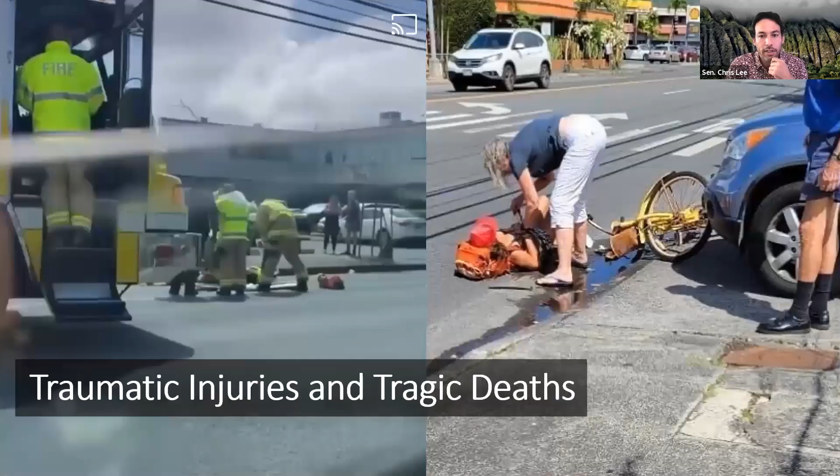The other thing we've been hearing a lot from our community, of course, is this kind of stuff - images of a couple unfortunate incidents just in the last month or two here in Kailua. This has been ongoing since I was a kid. I was hit by a car while riding a bike back in the day. And we see that constantly.

This is something that I think we all want to address. It's the worst thing to have to field a call from a family who lost their kid, or a family member, or a neighbor, or a friend. And yet here we are, still seeing a lot of that. So the question is, what do we do about it?

I think we leave it to the city - they've got a lot of good data on crash injuries and all that stuff - but our schools have reached out asking for help over the last few years. We've talked with the principals, talked with PTAs, talked with parents who want to be able to get their kids more safely to school. We've heard from our senior citizens and Kupuna and a whole bunch of organizations.

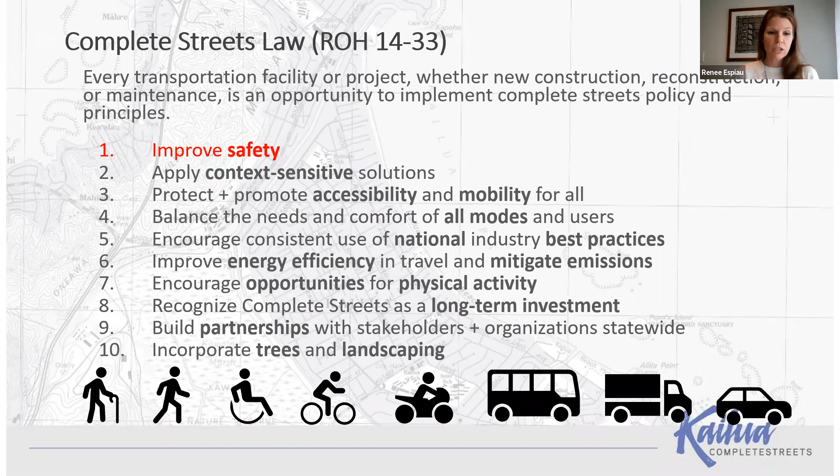Unfortunately the reality today is a little bit more like this. We've got lots of traffic, very heavy volumes at certain times of the day, high speeds, and you're sort of on your own sometimes if you're trying to walk or bike on those streets.

So a major goal for us is really to control traffic speeds. A major factor in whether people actually survive a crash is how fast that car is going when they are hit. So if you get hit and a car is going 20 miles per hour, there's about a 90% chance that you're going to survive. If that car is going 40 miles per hour, you have about a 10% chance of surviving.

This is one of our goals - to always try to slow traffic on our urban streets, because we do make mistakes. We're all human. Things do happen. But we want to make sure that the consequences of those are not always fatal.

So one of the reasons we have traffic traveling so fast on our streets is that the traffic engineering profession generally designs streets for the peak hour of the day, or maybe the peak 2 hours of the day, in the morning and afternoon. The consequence of that is that we have very large over-designed streets for about 22 hours of the day. And if you're an aggressive driver, this certainly allows you to speed, right?

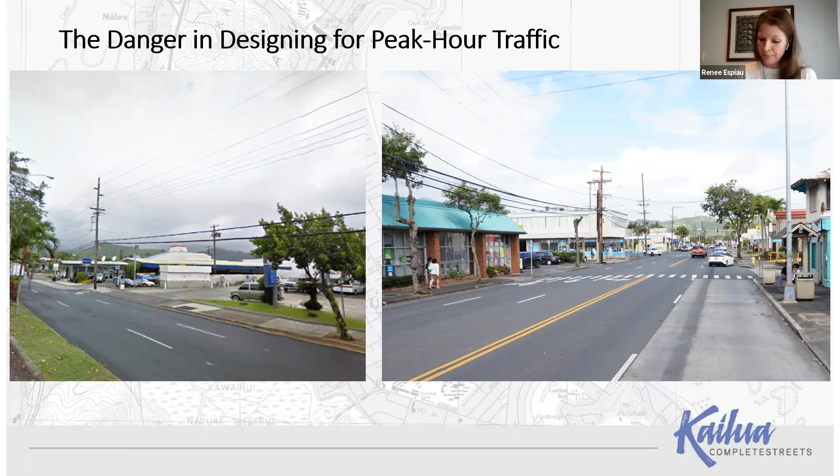Sadly, this crash pattern isn't great for other vulnerable roadway users as well. This is an extremely unscientific survey that I had a friend of mine run with 3 of her classes at Kalaheo High School. Basically half of kids have been hit by a car or know someone very well who's been hit by a car. So we have about half of Kailua youth really having some kind of traumatic experience with traffic. As a new mom who lives in Kailua, I find this both completely terrifying and just very sad that this is sort of the status quo we have in our community.

This is a crash map that shows different crash types - vehicular, bicyclist, pedestrian. These are just reported crashes, of course, when EMS is called, when an ambulance is called to the scene. But of course we all know that this stuff happens and never gets reported, so we actually have many more incidents than this.

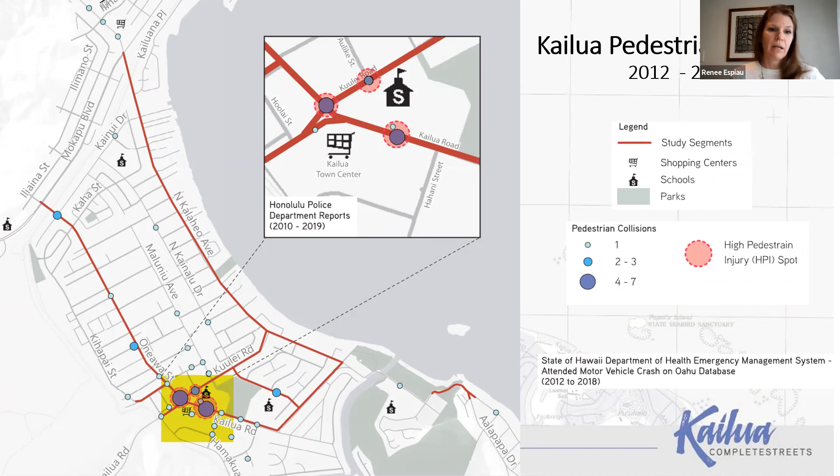You can see it's really scattered all throughout our community, but as we show on the next 2 slides, when we talk about pedestrians and bicyclists, we actually do have certain areas that are particularly problematic and where these problems are concentrated. So you can see with the pedestrian crashes, really concentrated in the downtown Kailua area. There's a few on Kailua Road, Ku'ulei Road as well, and particularly that Ku'ulei Oneawa Kailua intersection is pretty bad.

For the bicycle collisions, a little bit different pattern. We certainly are seeing major concentrations on Ku'ulei Road. That's an area where we see lots of bicyclists today riding against traffic, riding on the sidewalk, really trying to connect, I think, between the beach and the urban core. We are going to be proposing some changes, particularly on Ku'ulei Road tonight as well. Hamakua - this data predates our bike lane there, and you can see actually there was a number of bicycle crashes on Hamakua as well.

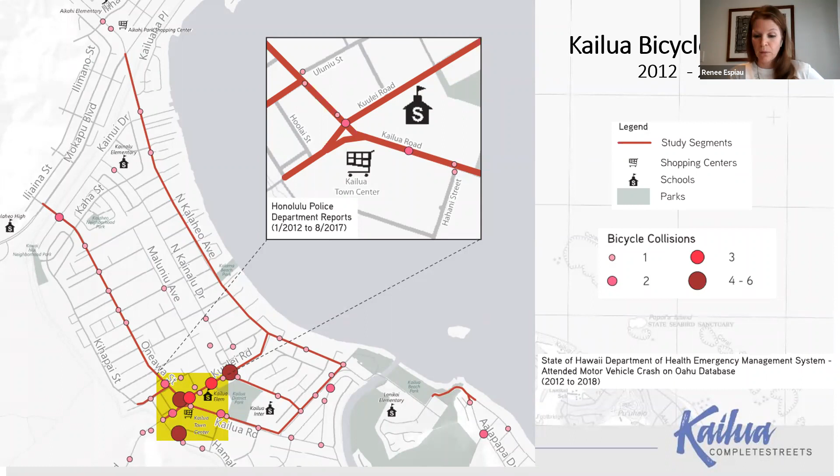Okay, so that brings us to our next poll. We want to ask you guys - you've seen the data, but what is your experience out on the streets? What street do you find most challenging to cross on foot? We've put a few in here. If there's something else that comes to mind, please feel free to note it in the chat. Romero, can you launch the poll question?

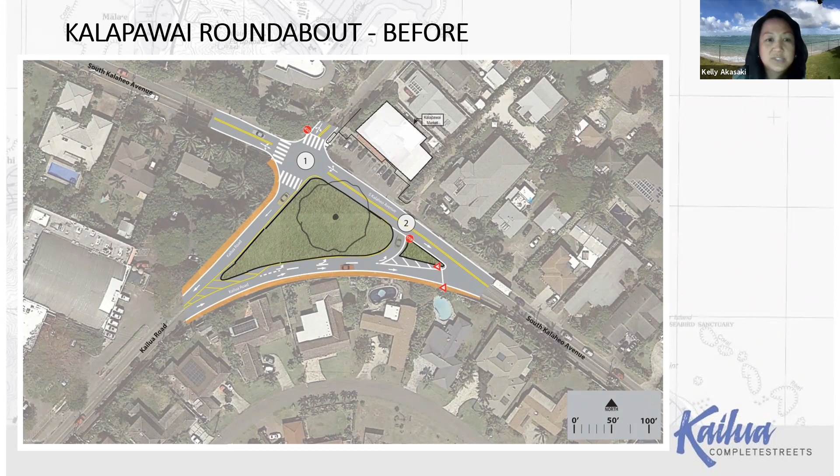Hello, my name is Kelly Akasaki and I am with the Traffic Engineering Division. I'm going to go over real quickly some of the construction projects coming up in the area. This first area, as a lot of you know, is the Kalapawai Market, Kailua, and Kalaheo Avenue. This picture is before we did the improvements in 2018. At that time, when Kailua's beach was named #1 in the world, we heard a lot of complaints from the Lanikai community especially. It was Councilmember Ikaika Anderson at that time, where traffic was backed up every weekend, every 3-day holiday. They had policemen out there directing traffic because of the left turns that had to wait in front of the Kalapawai Market. So this is what the traffic pattern was like before.

Next slide, please. This is what we proposed to put in as phase 1, which was only a pilot project to see if the new traffic patterns would help alleviate some of the traffic backing up into Lanikai. Since 2018, before COVID started, traffic was greatly improved because of this new roundabout pattern we put in. However, it was only a pilot project using simple asphalt, to the point where if it didn't work, we would go back to the original plan. But now that our traffic studies have agreed that it does work and does alleviate some of the traffic, we are moving forward to phase 2.

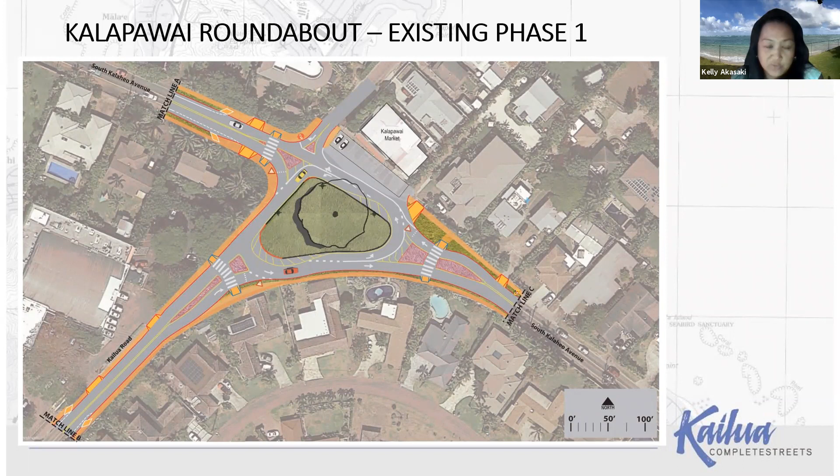Next slide, please, which will hardscape a lot of these improvements and slow down traffic even more. When we did the pilot project, phase 1, we had to use all the existing roadways, which did not have a lot of deflection and didn't really slow people down getting into the circles. Phase 2 will help us slow down traffic even more, as well as improve a lot of the sidewalk areas.

The biggest thing we are trying to fix with phase 2 is to improve a lot of the drainage in the area. There are floodings that happen closer to the market, as well as on approach to the circle when headed towards Island Snow. So the project will include pavers and more drainage improvements so flooding doesn't occur in the sidewalk areas.

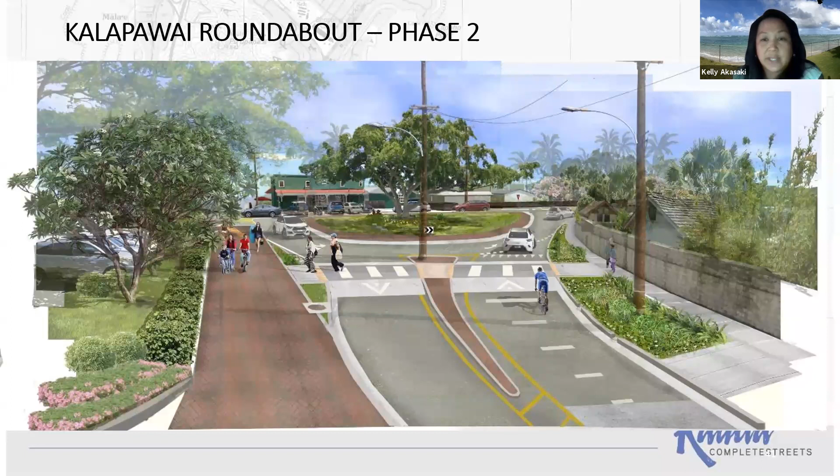Next slide, please. Right now, as I'm sure a lot of you know, Board of Water Supply is currently in front of the market installing a new water line. Their project is supposed to run until August of this year. Then we'll have HECO come in to relocate 3 poles right after them in September. Phase 2 construction will start right after that, hopefully by the end of this year. Our construction time is about 620 working days.

Next slide, please. The second project I wanted to talk about that DTS will be starting soon is to relocate one of the crosswalks along Kailua Road. Right now, the crosswalk is fronting the old Macy's, and at that time we had a lot of concerns that the trees were causing too much shadow and that the lighting was not the best in that area.

Once they built out Whole Foods and CPK, a lot of pedestrians cross in this area anyway to get across to the Times side. So what we're proposing here is to relocate the crosswalk, add a break in the median, and put in what is called a rectangular rapid flashing beacon. It's pretty much a pedestrian activated crossing light. When the pedestrian wants to cross, similar to this picture here, they push a button and the lights wigwag back and forth to let the motorist know a pedestrian is waiting to cross.

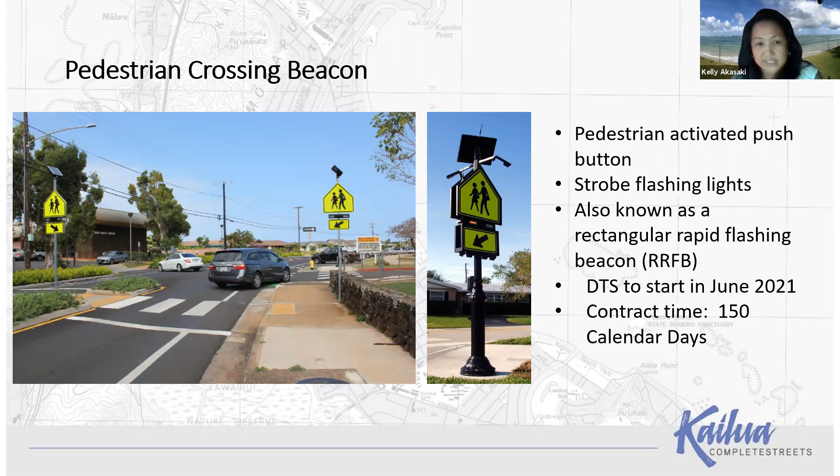Next slide, please. The last project I wanted to bring up, which the community also raises, is Aulike Kuulei Road. This is right by McDonald's, where the senior home is on the backside of Aulike. We have a lot of pedestrians crossing there, a lot of kupuna and keiki, and they have always asked for a traffic signal.

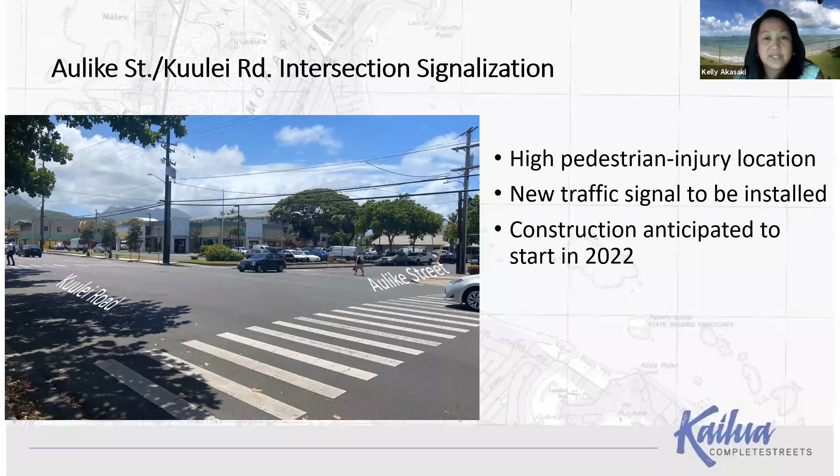The traffic signal is currently in design, and we want to let everyone know that construction is anticipated to start in early 2022. That is the last project we have ongoing in the area in the next couple of months. Next slide, please.

Thanks, Kelly. Okay, on to the new ideas. We need your feedback. We brought you guys here because we value your opinions. We're going to present some preliminary concepts that have been developed in response to all the concerns that we've shared with you tonight. We cannot do all of these improvements at once, so we really need your feedback to prioritize the improvements and prioritize limited funding.

Generally we are not taking any right-of-way — there's no land acquisition here. We're really working within the roadway boundaries as they are set. Of course we all know there are competing interests for any limited resource, including roadway space. So really our goal is to find that balance between providing more dedicated space for people walking and biking, safer streets, and the need to move traffic efficiently.

As I mentioned before, we will probably implement a lot of these improvements in conjunction with future repaving projects, but we do have opportunities for more immediate interventions for smaller projects or lower cost improvements.

Next slide. So we have done a number of outreach activities over the last several years — crash analysis, traffic engineering models — to come up with the proposed concepts, as well as met with lots of people in the community: the schools being first and foremost, our emergency service department, Alexander and Baldwin, Parks Department, and so on.

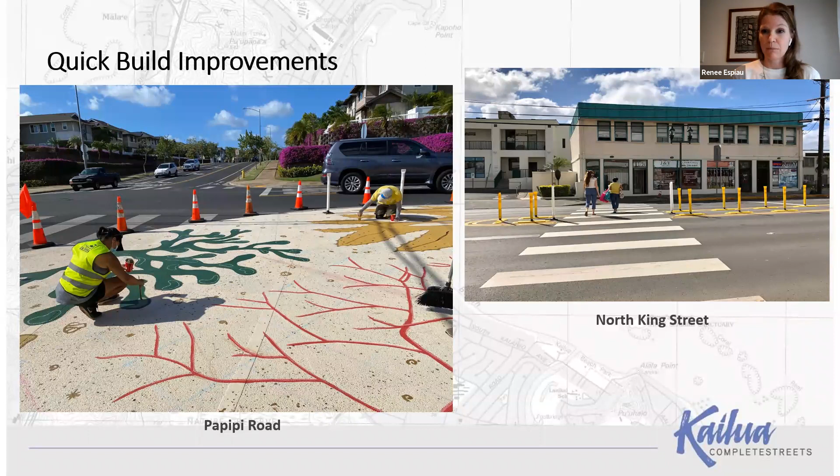There are sort of three different ways we can deliver projects. The shortest, cheapest, quickest way is what we call quick build improvements. These are some examples: the one on the left is curb extensions we did with the community painting out in Ewa Beach, and the one on the right shows a pop-up median with modular materials done at very low cost. Next slide.

Other improvements can be done with repaving, just with striping. You can actually achieve a whole lot with just striping, and we can do those also as standalone projects within the paved area, between the two curbs.

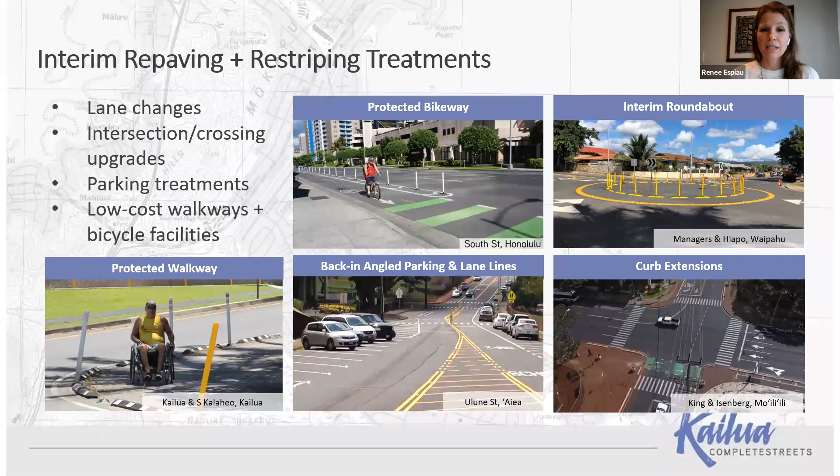And then other improvements like sidewalks, next slide, and such actually do require a full capital project. Sidewalks, of course, are very popular, but they're also very expensive — they require concrete, utility relocation, money, and time. It doesn't mean they're not important; it just means we have to consider that as we come up with a strategy for moving ahead.

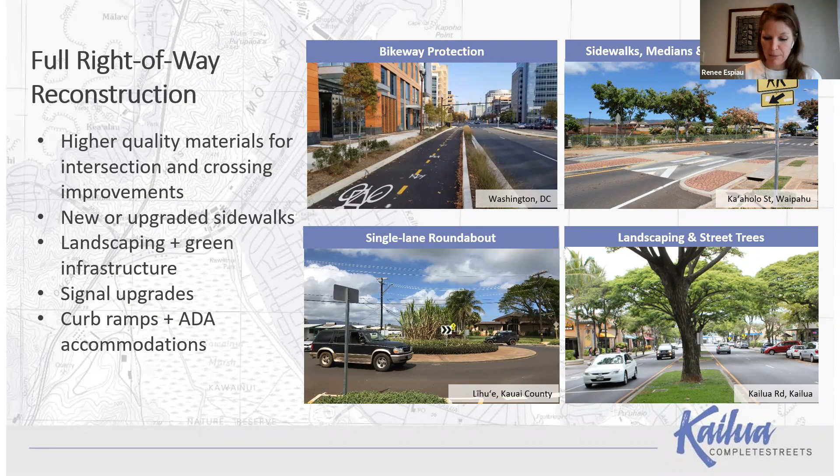And then finally, before I pass it off to our consultant team — we really are focused tonight primarily on the transportation function of our streets, but the Complete Streets program does consider other uses of the street as well, including ecological functions. We're always looking for opportunities to plant more street trees, and we have been experimenting lately with different permeable pavers and ways to make our urban street trees much happier, such as this picture on the right, where the roots can grow below the sidewalk. So we're always looking to pilot those sort of strategies and have that opportunity before us.

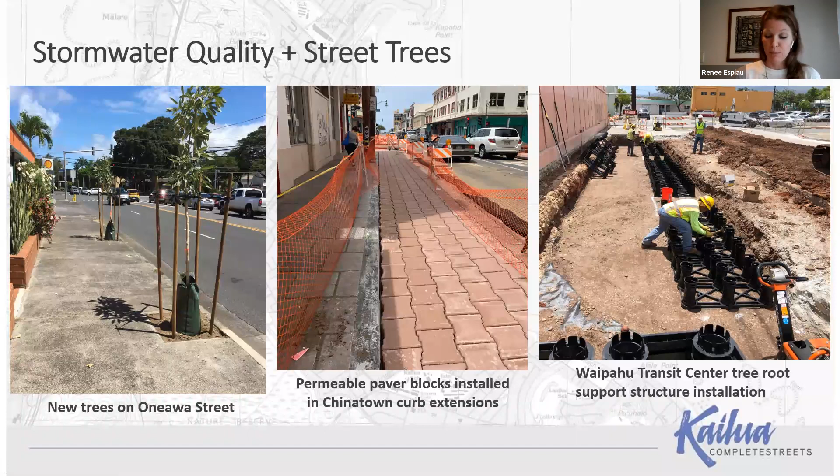What we're really trying to achieve here is to attract the folks who aren't comfortable riding bicycles in traffic. About 10 to 15% of people are pretty comfortable riding regardless of bike lanes. But about half of us want to bike yet are probably scared to get out on the street, particularly with our kids. These are the kind of facilities that really appeal to them.

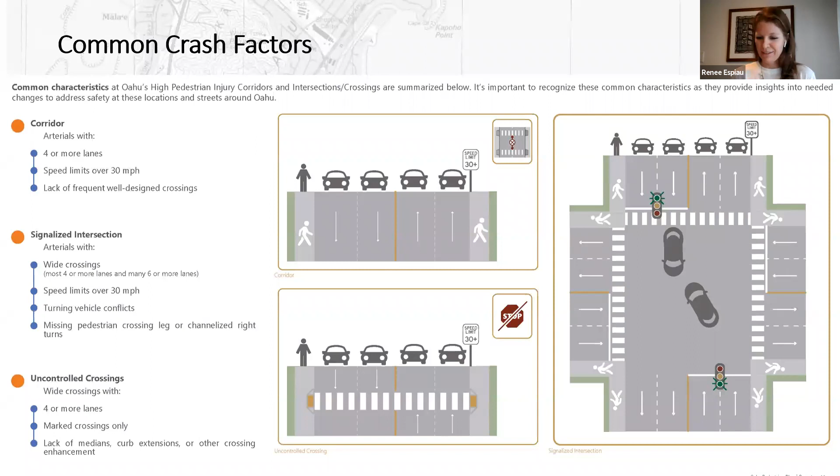Now let me turn it over to Sohrab Rashid, our traffic engineer on the project, to explain some additional tools we'll be looking at tonight. Then Lindsay, our civil engineer, will walk us through the details of the plan. And Umeo, who I haven't introduced, will continue to help us with the polling.

Thanks, Renee. I wanted to provide some context on how the design of different roadway sections and intersections results in a higher propensity for crashes or more severe crashes. While there's variation by roadway type or location, common crash factors include posted speed limits over 30 miles an hour, or where people travel much faster.

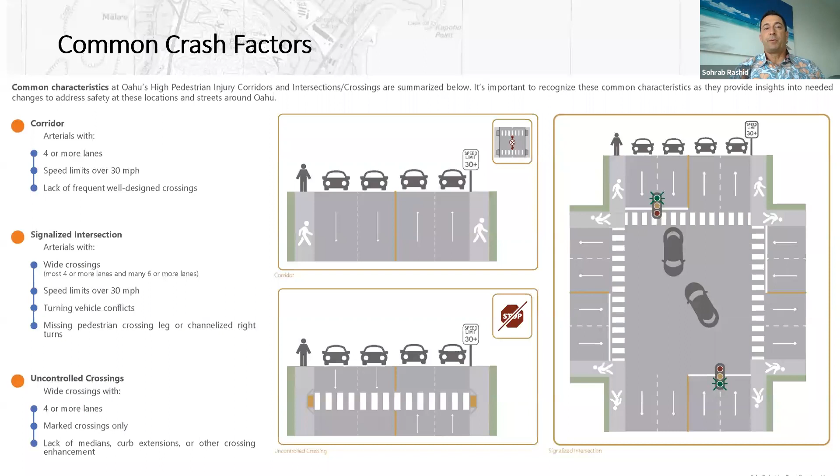Other factors include 4 or more travel lanes, usually 2 in each direction, turning movement conflicts like the graphic on the right shows at a signalized intersection, and a lack of pedestrian-designated crosswalks or other safety enhancements. Whether crossing at a mid-block location or an intersection, crossing more than 2 travel lanes without some refuge or protection can be hazardous.

One of the main reasons for this problem is what's referred to as a multi-lane or multiple threat situation. This occurs where there are 2 travel lanes in one direction: one vehicle stops for a pedestrian who leaves the curb, as you can see in this photo, but the driver in the inside lane isn't able to see the pedestrian until it's too late.

So we need other treatments to help avoid a potentially tragic situation. One thing I wanted to point out is some of the schemes you'll see tonight, especially on Oneawa Street, where we have this multiple lane situation at an unsignalized intersection in the commercial section of the street. If we're not able to provide either a pedestrian refuge or other treatments, this crosswalk would actually have to be removed.

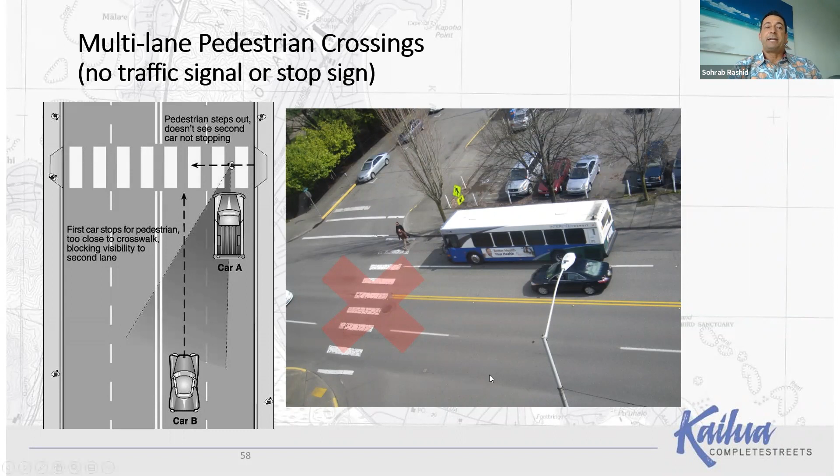There are a couple ways we can enhance safety. One way is to make pedestrians more visible by putting them closer to the driver's view, but in a more protected situation, or by installing a visual warning light. Refuge areas or crossing islands, like the example on Kailua Road, allow people to cross traffic so they only have to wait for a gap in one direction, then wait for a gap in another—a benefit to both vehicles and pedestrians.

They can also be designed so a pedestrian is aligned more toward approaching traffic, helping them figure out whether it's okay to cross. Kelly already touched on the photo in the bottom right, the RRFB, or rectangular rapid flashing beacon—a warning light activated by the pedestrian. This is actually better for drivers than a regular traffic signal, since they only have to wait for the pedestrian to clear the crosswalk rather than waiting for a light to cycle through. These treatments are both very effective in reducing crashes, essentially cutting them in half.

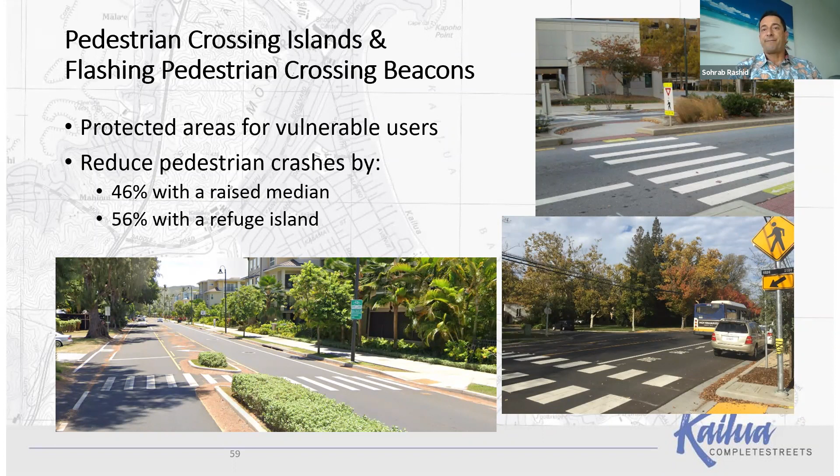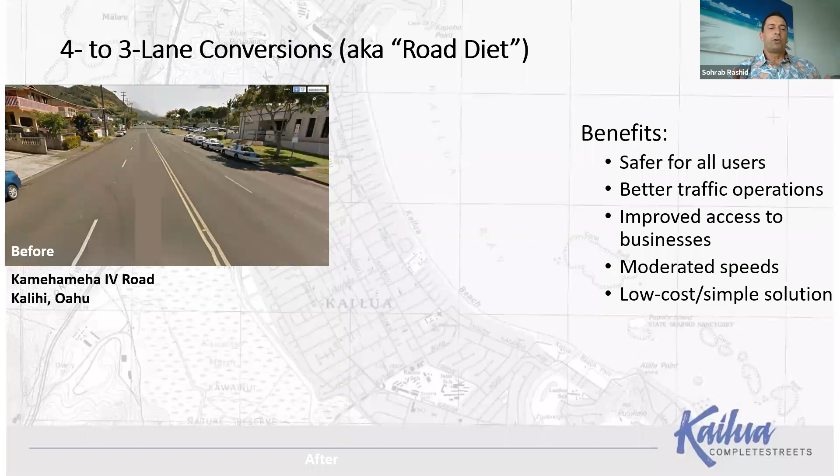Another improvement treatment we're looking at is known as a road diet, which enhances both safety and traffic operations. It involves converting a 4-lane section to a 3-lane section, installing a two-way center left turn lane in the center, as shown in this example on Kamehameha IV Road in Kalihi. There are other examples on the island too, like Lehua Avenue in Pearl City, and Hamakua in Kailua, which many people are familiar with.

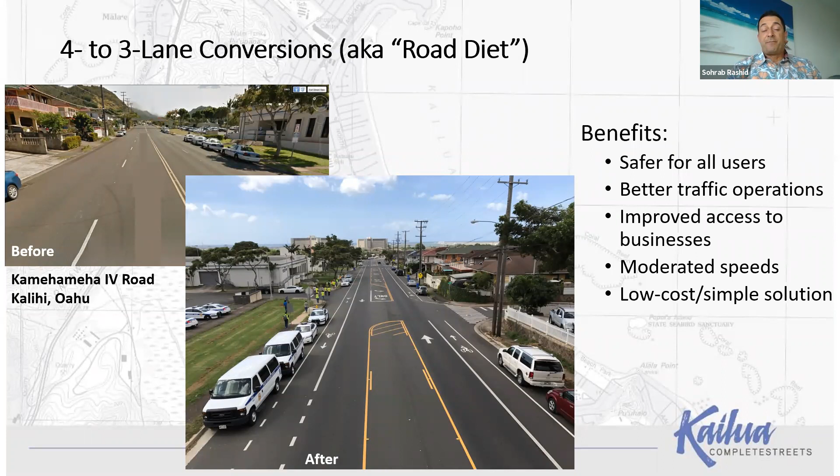Repurposing the existing space this way does several things. Ultimately, it improves the safety of the street and eliminates those multiple threat crashes I talked about. We can reduce crashes by somewhere between 19 and 47% with this type of treatment. It improves traffic operations by eliminating the quick slalom-like changes people make trying to avoid vehicles in the left turn lane or in the inside lane making a left turn. So it maintains through traffic flow better, better designates right of way for all users of the street, reduces speeding, and improves access to local businesses by making it easier to get into and out of local driveways.

Curb extensions are another way to make pedestrians more visible to drivers at intersections. They also moderate the turning speed of vehicles, which is really important in terms of safety.

Renee touched on the travel speed question earlier. Curb extensions also reduce the amount of time pedestrians are exposed to traffic by shortening the pedestrian crossing distance. These can also be opportunities to beautify the community, through art or landscaping treatments. Their quantified safety benefit is a 30% reduction in all crashes at locations where they're implemented.

When a lot of people cross at an intersection during a concentrated time, one method of improving safety and reducing conflicts between vehicles and pedestrians is implementing an all-way pedestrian-only phase, sometimes referred to as a pedestrian scramble. During the walk phase, all pedestrian movements can be made at the same time, so pedestrians can cross in any direction directly. Then when the signal gives a don't walk indication, all traffic movements are able to proceed and don't have to wait for pedestrians to cross.

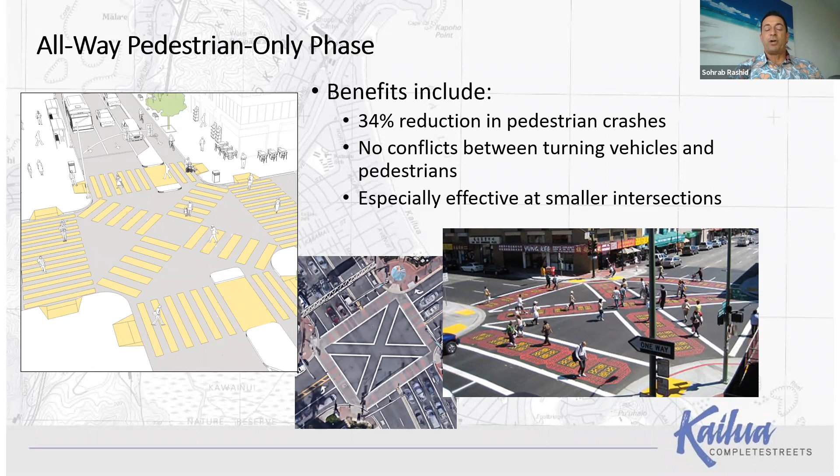This is an example at Hahani, where people making a left toward the Mokapu direction on Kailua Road would not have to wait in this particular case. It actually works well at small intersections when the crossing distance is short, and therefore the pedestrian phase is short.

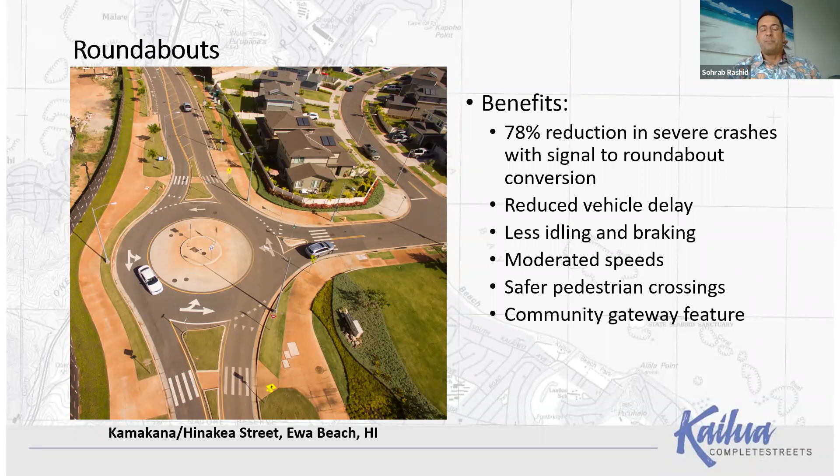You have reduced vehicle delay. As a driver, you're waiting for either a pedestrian to cross or for vehicles to circulate within the roundabout. Otherwise, traffic continues to flow, but at a safe speed. The benefit for pedestrians is that in most cases they only have to cross one lane at a time, standing in the refuge area. Roundabouts can also be a community benefit by serving as a gateway feature.

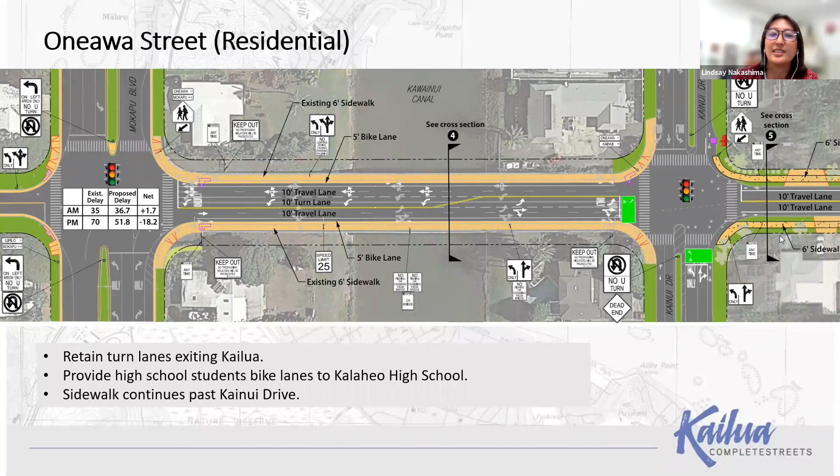Also within this section, we continued the bike lane, which goes to Kaha Street and will eventually take you to the neighborhood park.

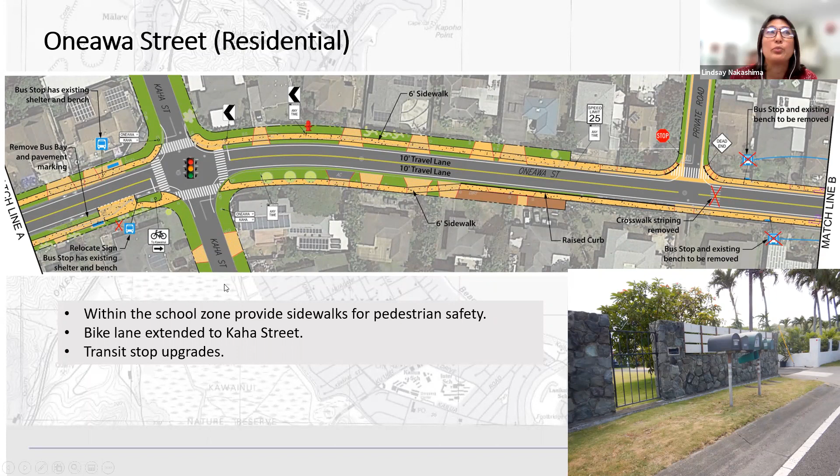The city cannot put back the crosswalk at these unsignalized intersections without the median. So in order to increase vehicular flow, we instead put in left turn pockets, which allow vehicles to wait for gaps and provide continuous flow in the through lanes.

Additionally, comments included that it was a scary place for bicyclists to ride. So with this wider street section through Oneawa, we added bike lanes on both sides.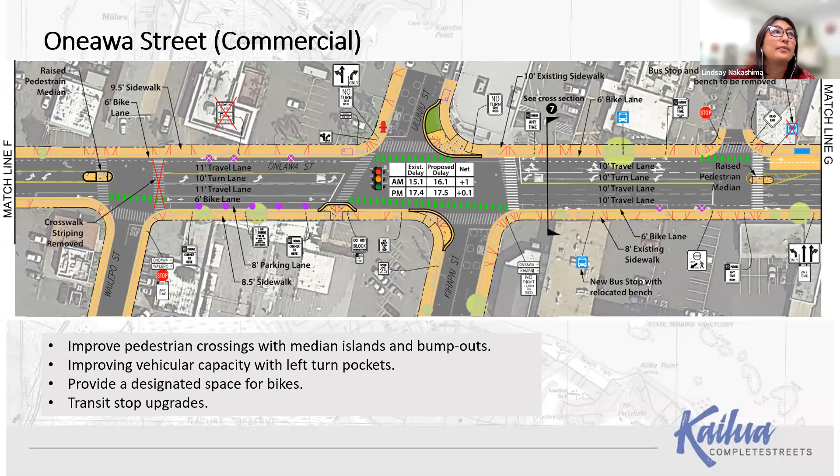We've already gotten some very good feedback since putting out this photo, and we do hear your comments. We know there are issues with the bus transit and that we need to make improvements to the sidewalks. So if you're interested in Oneawa, please attend one of the breakout room sessions and we can discuss this further.

We'll start with our first poll. Do you support upgrading sidewalks along the residential portion of Oneawa Street?

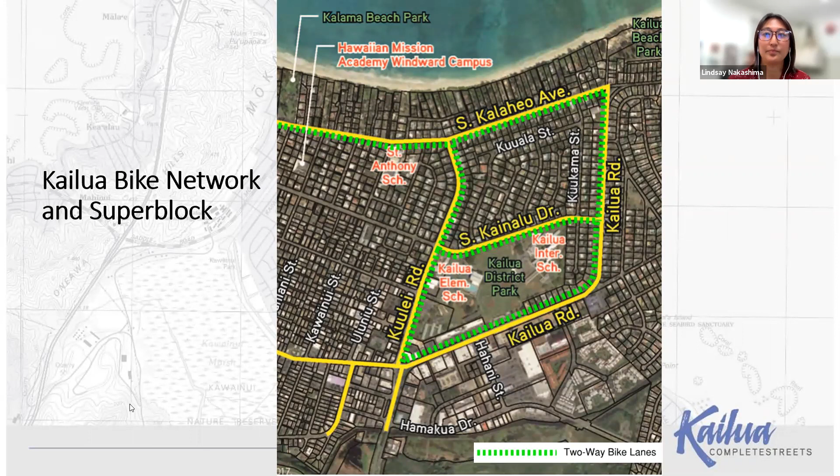The Superblock is again 2-directional, so the bikes can go in either direction. There's still sidewalks as well, which will remain. As we continue to collect data, DTS is considering limiting left turns as a safety precaution going into these Makai side businesses, because they would have to cross 2 lanes of traffic and figure out how to navigate the two-way bicycle lanes as well.

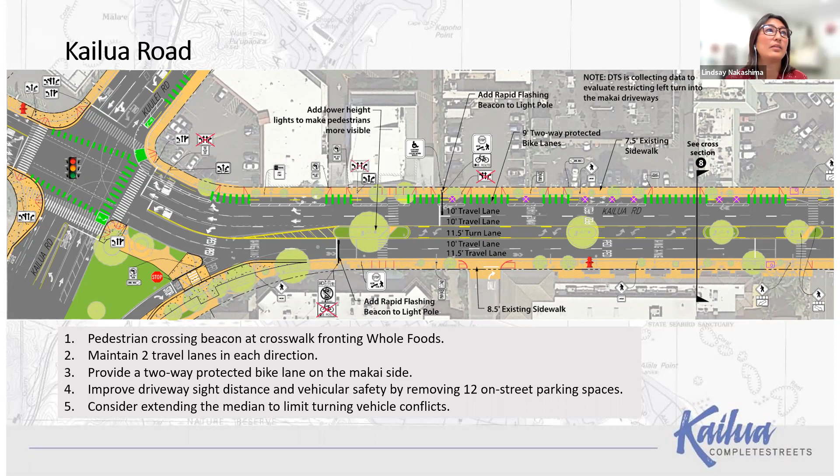Other comments we got for this area included adding sidewalks here and maintaining the vehicular movements, so all the turning movements.

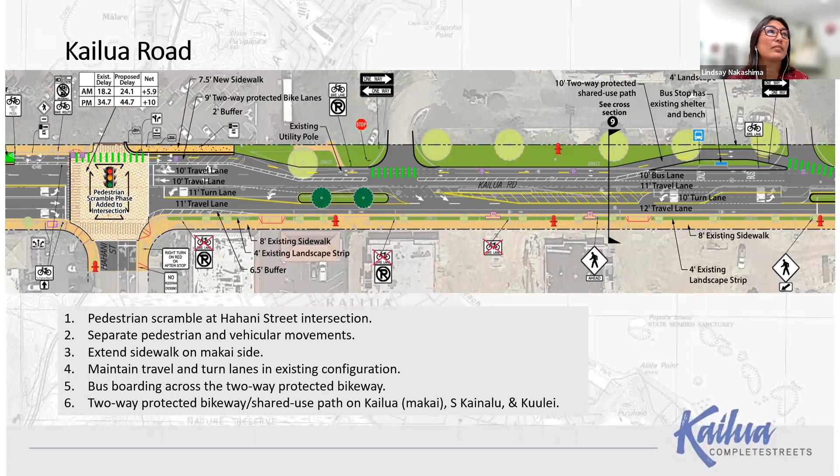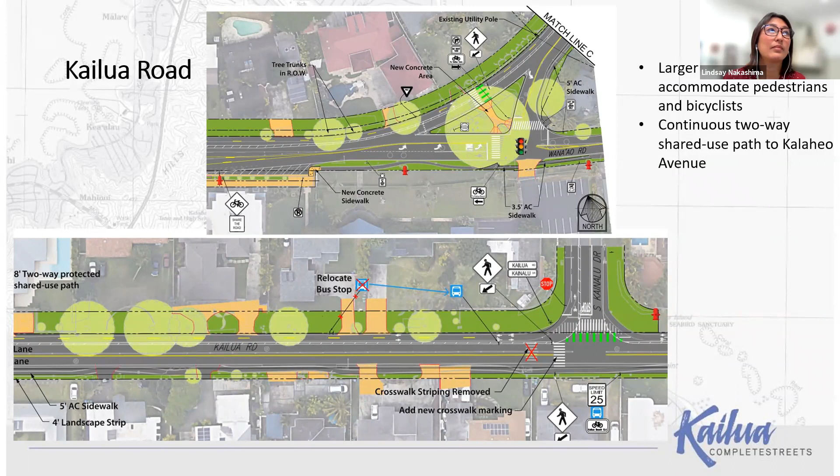As was reported earlier, Aulike Street will be signalized, planned for 2022. Vehicular turning lanes were mostly maintained at Oneawa, so we still have the double lefts here, the through and the right only, and again over here, left-throughs.

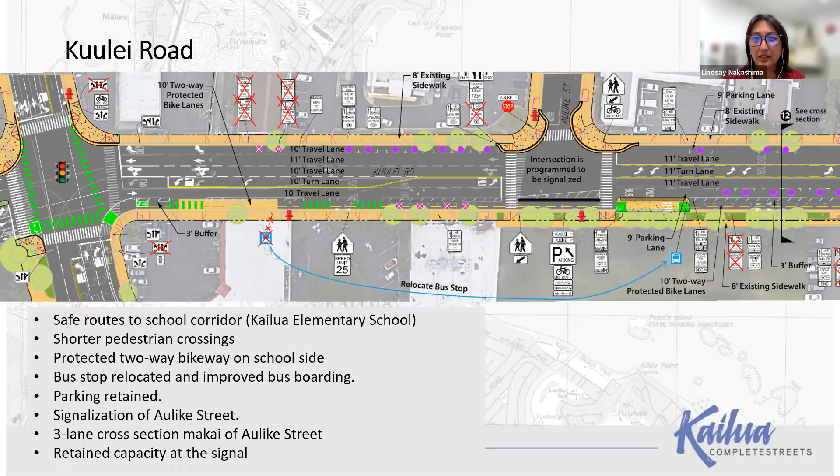As we head down Kuulei, we'll see that this is where we're proposing 4 lanes to 3 lanes to reduce potential conflicts. We're also looking at continuing that sidewalk in front of 7-Eleven, keeping the protected bike lane in front of the school, the library, the police station, and the fire station.

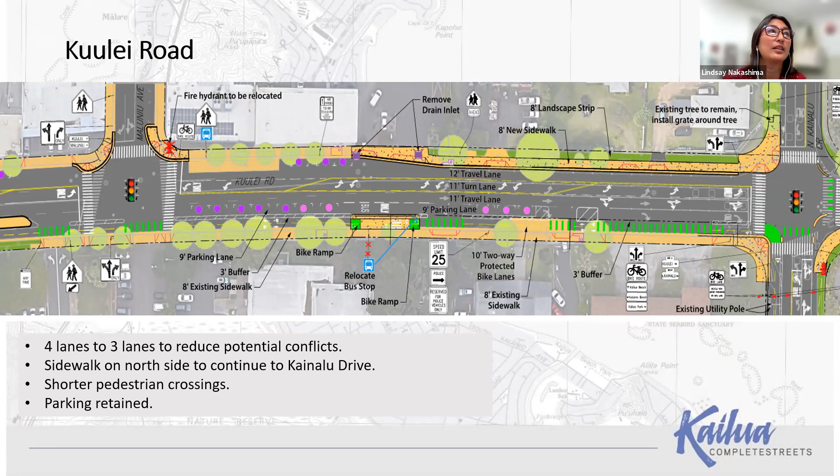So now we're going to ask you again for your input. Do you support the proposed school zone safety improvements on Kuulei Road?

Okay, it looks like most have voted. 5, 4, 3, 2, 1. Okay, 56% like it, 24% mostly like it, 18% don't like it.

I'm going to move now to South Kainalu Drive, just this section fronting the fire station, the district park, and intermediate school.

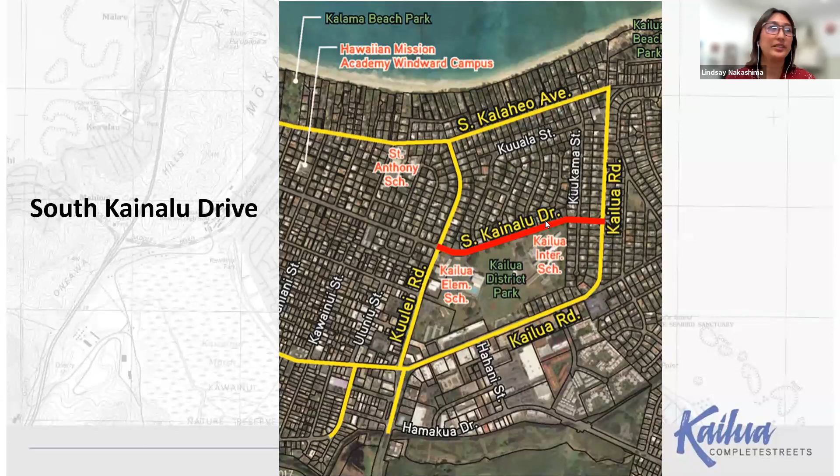Hey Lindsay, sorry to interrupt. Some people are having a little hard time following, so just point out some landmarks if you can.

So for South Kainalu Drive, what we heard comments for this section including making it safer for the kids. There's a lot of intermediate school kids who ride their bicycles to school. We also heard that there's speeding in vehicles, driving in the wide shoulder, and that bicyclists are riding in the wrong direction.

So for South Kainalu Drive, this side of the street right now is the intermediate school, and this is Ku'uhale Street. In order to address these safety concerns, the two-way protected bicycle or shared use path in this case will be on the Mauka side, same side as the intermediate school. The travel lanes were reduced to 10 feet and the shoulder was reduced to 3 feet. The improvements here do require a little bit more asphalt to be poured, so it's going to be widened on the shared use path side.

How do you feel about providing this two-way shared use path on South Kainalu Drive next to the park and the intermediate school? The choices are like it, mostly like but need some improvements, don't care, or don't like it. Or let's keep the existing unprotected bike lanes.

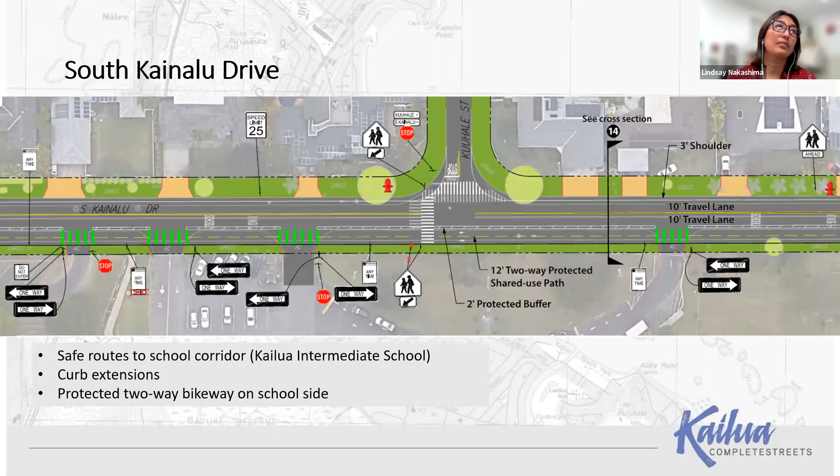So now we'll move on to this short segment of Kailua Road, between Hamakua and Oneawa. So to orient you guys, Hamakua is on this side. Kailua and the Oneawa intersection is on this side, and Kuulei is over here on this side.

Okay, so observations and comments that we saw for this area included that it's a dangerous place to cross the street. It's hard to navigate the left turns through this unsignalized area, more cars are wanting to turn left onto Hamakua Drive, and buses stop and go along both sides of the street.

So what we've done is we've added curb extensions to make shorter crossing distances for the pedestrians. We've also checked and added the bike lanes, so the bike lanes will continue up through here and connect to the Hamakua Drive ones as well.

And we have gotten comments from Kailua residents on the very creative ways that people are instead trying to make this turn. Instead, they're coming either straight across or coming off of Puniu Street. So we are looking at ways to make this better and not bypassing this left turn. Thank you for those comments.

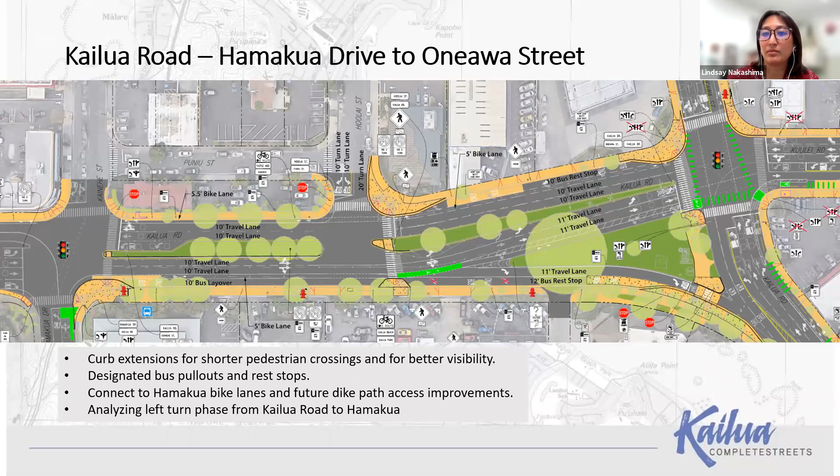Another one of the short segments here is Kihapai Street. To orient you again, Oneawa Street is on the right-hand side, Hoolai in the middle, and Kainehe here. So this area, we're just proposing to make the curb extensions to make the crossing shorter, and we're retaining the parking since we know that's important. Instead it will have sharrows for bike lanes in the roadway section.

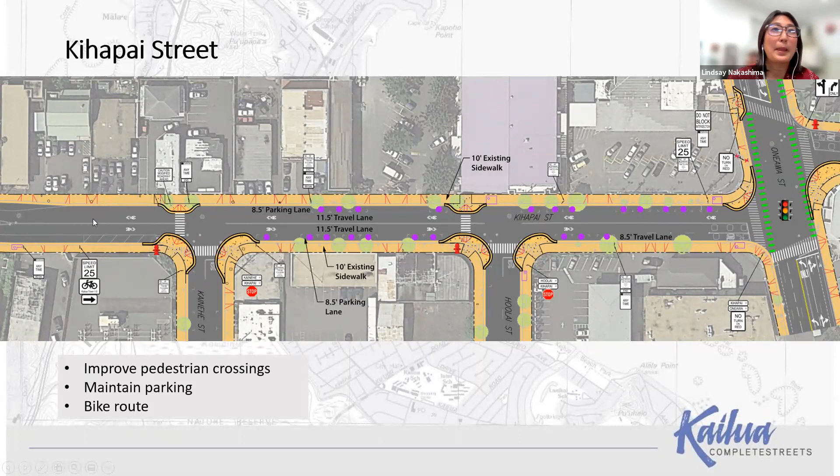Another area we heard some comments on and wanted to bring up real quick was the area in front of the Aikahi shopping center. Mokapu Road is over here, the Aikahi Park shopping center is on this side. We did hear concerns that there's missing sidewalks and whatnot.

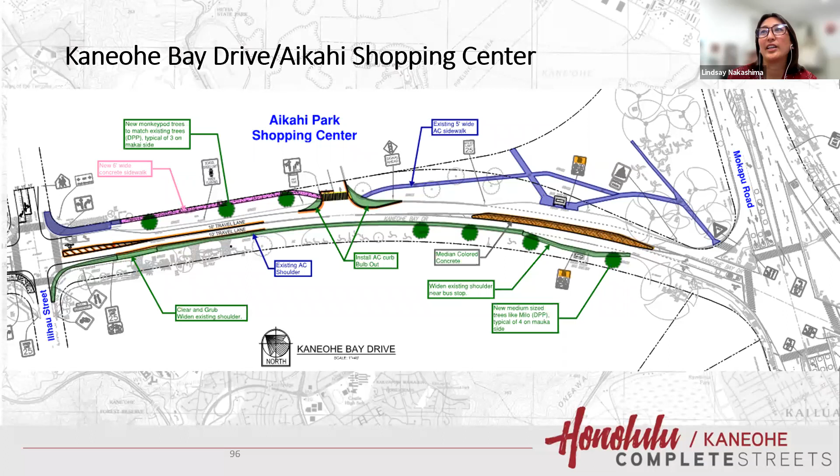So on this plan, we're showing in purple the existing sidewalks, and the pinks will be new, as well as the green over here on this side. This, as a complete streets, is being looked at. It's just under the Kaneohe Complete Streets road sections instead.

So to continue from there, we'll go for North Kalaheo Avenue to South Kalaheo Avenue, starting out here at Mokapu Boulevard.

So to give you an overview, this is what it looks like now, and this is the proposed single lane roundabout, because we have such a large right of way. The proposed improvements will start here at Mokapu Boulevard and include this roundabout instead of a signal. This could help improve flow, reduce wait times, and lessen the number of potential conflicts with all modes of transportation.

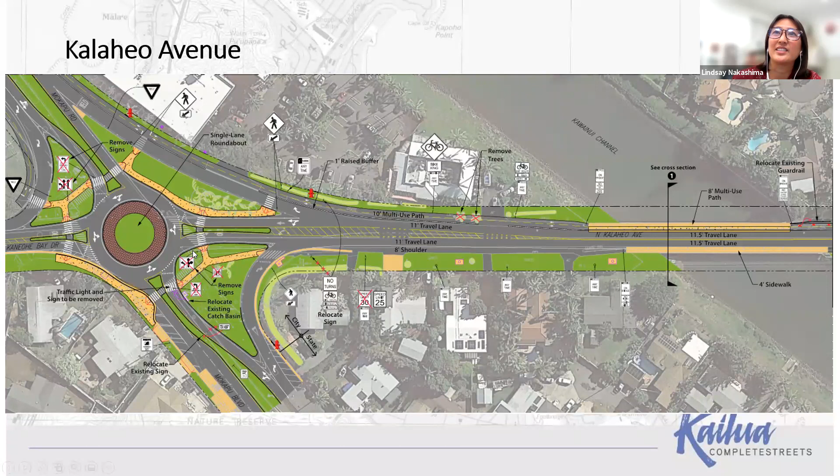Comments received for this intersection said that there's congestion, long waits, and the intersection is skewed in a way that it's not easy to see which direction the cars are coming down Mokapu. So, let's show it again.

Comments we heard through the main corridor for Kalaheo included wanting better safety for walkers and runners on the Makai side, better riding conditions for the kids in the shoulder, and figuring out what to do about the definitely narrow sections, which puts the pedestrians very close to those speeding vehicles. Other comments received included speeding on the straight sections, and of course, not enough crosswalks to the beach access and alleys.

So we did take a poll a while back. I'm not sure if anybody on the call has done this, but we wanted to see what types of improvements you would be interested in seeing. We proposed two alternates: one was a bike route with enhanced sidewalks for the Kalaheo section, and the other was a two-way protected bicycle or shared use path on the Makai side. At that time, about 122 of you had answered and preferred this proposed alternate 2 section, which is what we are proposing.

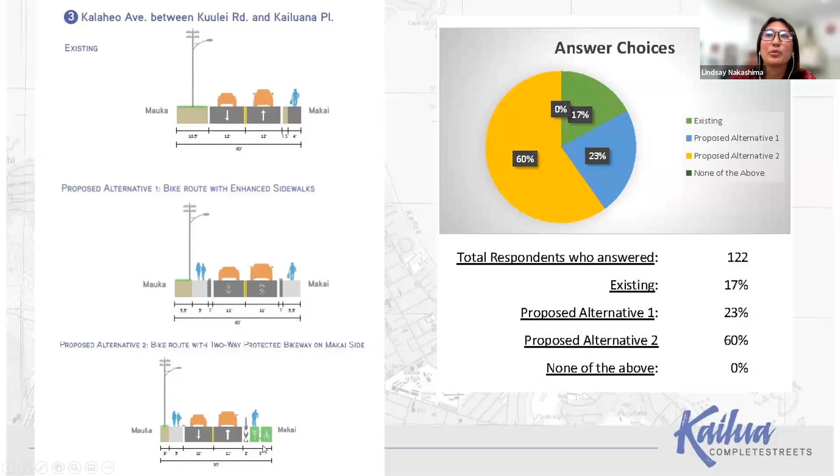So what does that look like? Here's the two-way protected bicycle or shared use path on the Makai side. We are also looking at speed reductions, bringing this down from 30 to 25, and making sure we added crosswalk markings for the beach access areas.

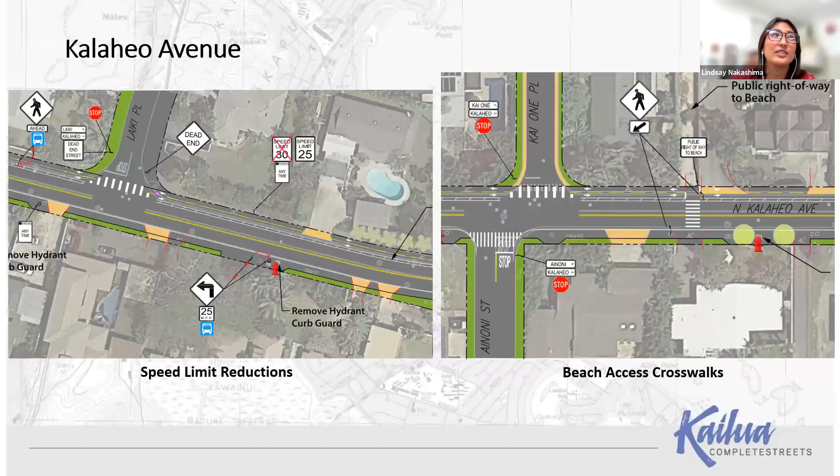Where North Kalaheo Avenue has a limited road section, the South Kalaheo Avenue section is a little wider, and there are some existing trees, mostly palms that we saw. The Makai side proposed improvements made adjustments for these palms, but ultimately not all of them can be kept. What we plan to do instead to mitigate these tree impacts is to provide street trees offsite in other areas, so they won't be lost. They could be put just not in the roadway section, or put back in the parks.

Another polling question: Do you support providing the two-way protected shared use facility to improve safety for biking and jogging on the Makai side of Kalaheo Avenue?

Okay, looks like most have responded. And here we go: 50% yes, 27% mostly, we could do some adjustments, and then 20% no.

One more question: Do you support removal of some trees within the right-of-way to provide space for pedestrian improvements? Yes, yes if trees can be replaced off-site, don't care, or no, not at all, keep the trees.

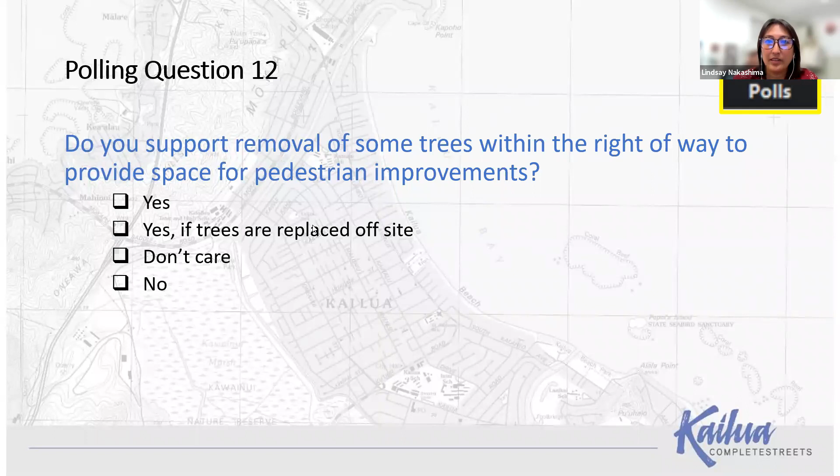Our next section moves on to Mokulua Drive. It was very apparent that this route to Lanikai is popular for pedestrians and bicyclists. So while the section is narrow, we are trying to propose improvements to widen the Makai side as much as we can on the shared use path, leave it on that side, and add a bike lane crossing over here to get to the bike lane that is already on Aalapapa Drive.

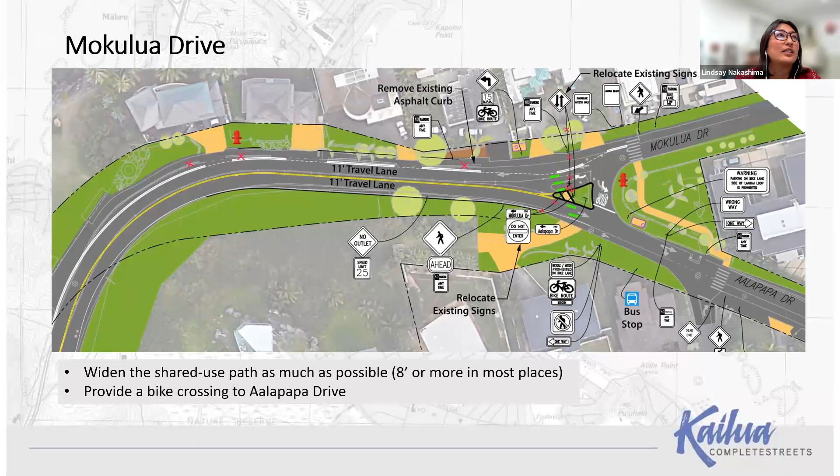All right, I think we've made it through most of the plans, and now we'd like to figure out which safety improvements you think should be prioritized. We've put a bunch of the improvements here — you can pick more than one. It'll start with Kalaheo, move to Kailua Road school improvements, Kailua Road pedestrian improvements, Kailua Road bikeway improvements, South Kainalu two-way shared use path, Oneawa residential sidewalks, Oneawa commercial area safety improvements, Kalaheo Avenue and Mokapu Boulevard roundabout, Mokulua Drive shared use path widening, or the Kihapai curb extensions and crosswalks. So please go ahead and vote — you can pick one, five, nine, or all of them.

See, Kalaheo's coming up. Oh, Oneawa's coming up. Oh, I see some Kuulei. Almost half of you voted.